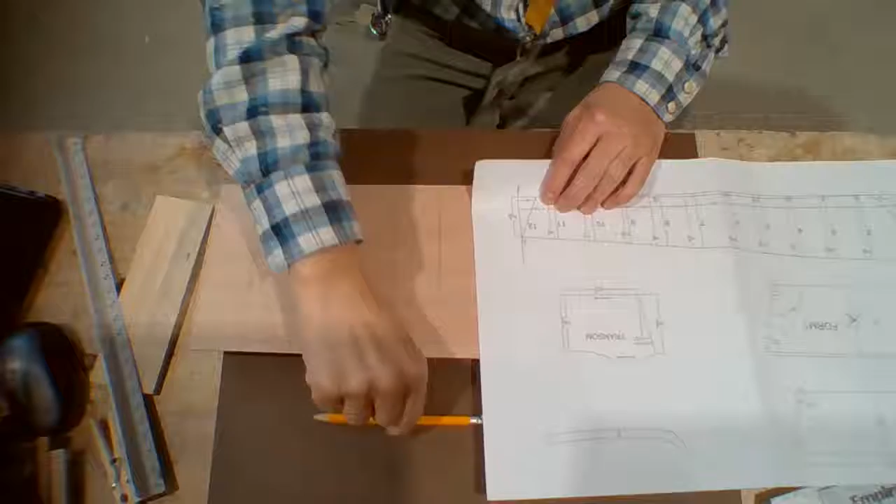Okay, I've got all my vertical lines numbered, and now what I'm going to do is plot out where the side of the boat, you can see the side of the boat, intersects with the vertical lines that I've made. So, for instance, I can look at this one right here. At line 11, it's 15 and a half.

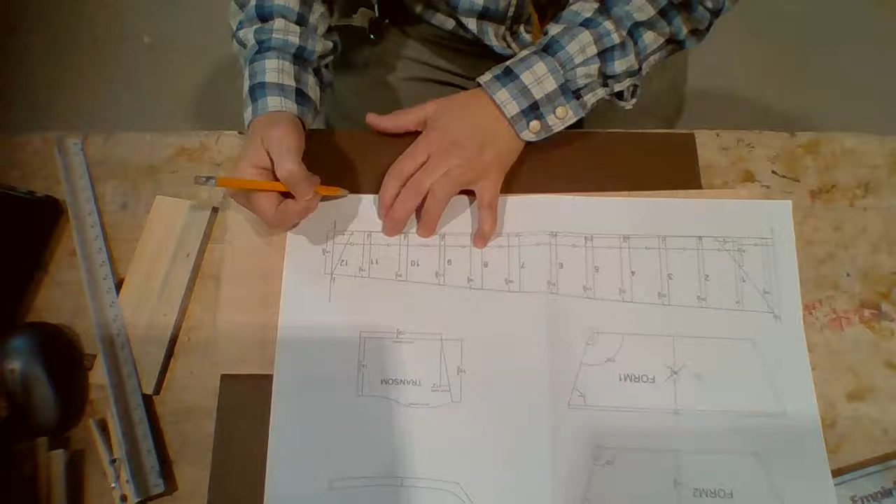Okay, so I've got to use a scale for this because I am measuring in eighths. So I had to find the eighth scale, and each of these represents an inch, and my measurement is 15 and a half. And if you look from the 0 going right, each of those lines is an inch. So it says 1, 2, 3, 4, and there's a 4 there.

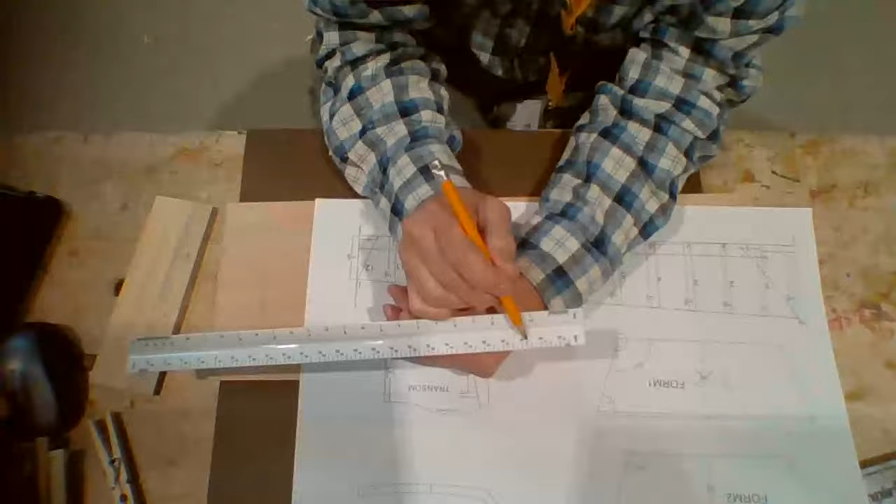Now, there are two sets of numbers, numbers on the top and numbers on the bottom. The numbers on the bottom don't make any sense for our scale. That's because they belong to another scale on this side. So we're just going to use the ones going from 0, and if you count over 1, 2, 3, 4, you see that makes sense. It says 4, 5, 6, 7, 8. That makes sense, right? So this is what I'm measuring. 0 this way, adding, and I'm going to come to 15. But I also need a half.

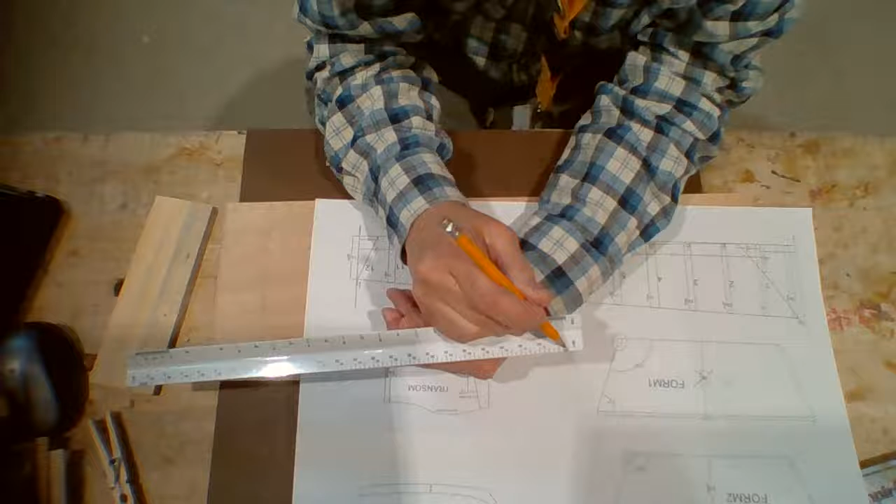So from the 0 over to the left here, there's 1 inch broken into some parts. Now, an eighth of an inch is very small, so it's not broken into much that's very helpful except the ½ inch mark. So the ½ inch mark, that's a helpful line. A 1/4 inch would be between the 0 and the ½ inch, kind of right in the center of that. 3/4 of an inch would be between ½ inch and 1 full inch.

And everything else, we're just going to have to estimate. Is it closer to an inch? Is it closer to ½ inch? Is it a little more than ½ inch? Is it a little less than ½ inch? Like that. It's going to be good enough for what we're doing. Okay, so I'm going to show you how to use this.

So I'm on number 11, right? And I'm looking for number 15. So here we go, because my measurement is 15 and a half. So one way to think of this is you can put the 15 down here, and 15 to 0 is 15, and then just add that ½ inch from this measurement, okay? And that's the line. You just put a little line on that, and you're good to go.

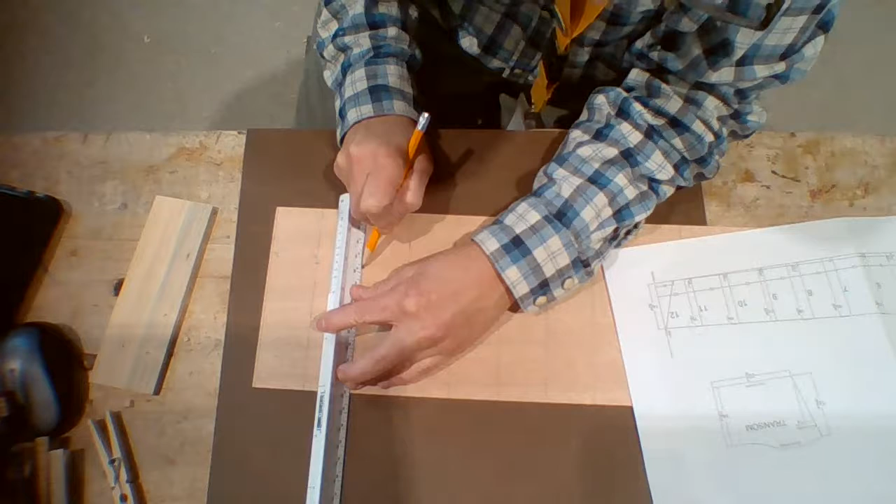So the next one, number 10, if I'm looking over here, says 16 and a half. Now, another way to do it is you could start off with the half, because you know you're going to have a ½ inch, and then you can go ½ inch up to 0, and then go to 16, and 16 is labeled, right? So then I've got a mark at 16 and a half, so I've got 2 marks.

The next one, number 9, is 17 and 9/16. Oh, geez, 9/16. So 9/16 is just a 16th bigger than 8/16, and 8/16 is 1/2. So let me put this on a half, and then just go a teeny tiny bit bigger, because we're in a very small scale here, and then I want to get up to 17. So I've got this little 9/16 here, and then I'm going to find 16, right? Here's 16, and then I want to go one bigger than 16.

So there you go. And if you looked at these, they're kind of 3 in a row. That looks sort of like it makes sense, right? Because the drawing is getting bigger here. Okay, so you're going to plot all of these all the way along, and the bottom ones all the way along. Just plot the measurements. I'm going to do a little bit right now about the front and the back.

So at the back, this measurement right here tells you that it's not right on the vertical, it's a 1/4 inch in from the vertical. Okay, so let's see. I don't know where it's going to be, but I do know that if that's a half, a 1/4 inch is less than that. So the 1/4 inch in thing is going to be about here, right?

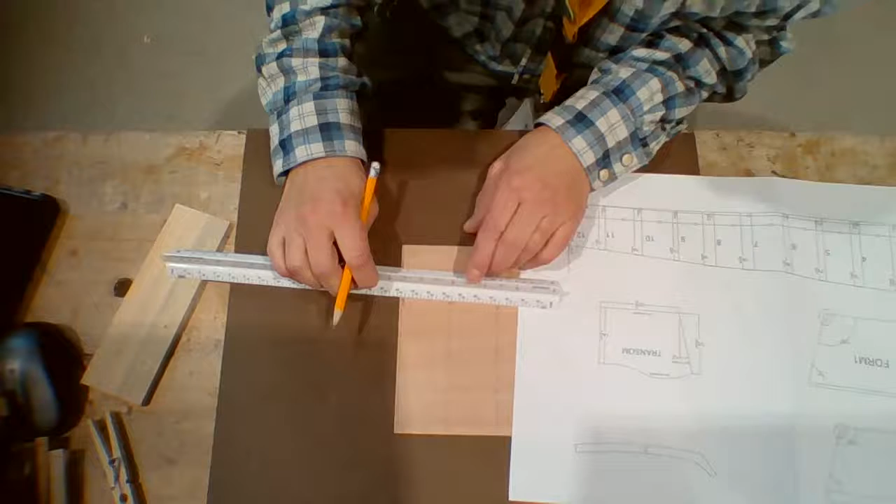And then the height of that is 14 and 9/16. So again, 14 and a little bit more than a half. So 12, 13, 14 at the very bottom edge, and then a tiny, tiny bit more than a half. Okay, so that's my intersection right there, okay? And again, that makes sense because these are kind of going down here. It's not going to exactly be a straight line because, believe it or not, this is a slight curve, but at least they're kind of making sense, okay?

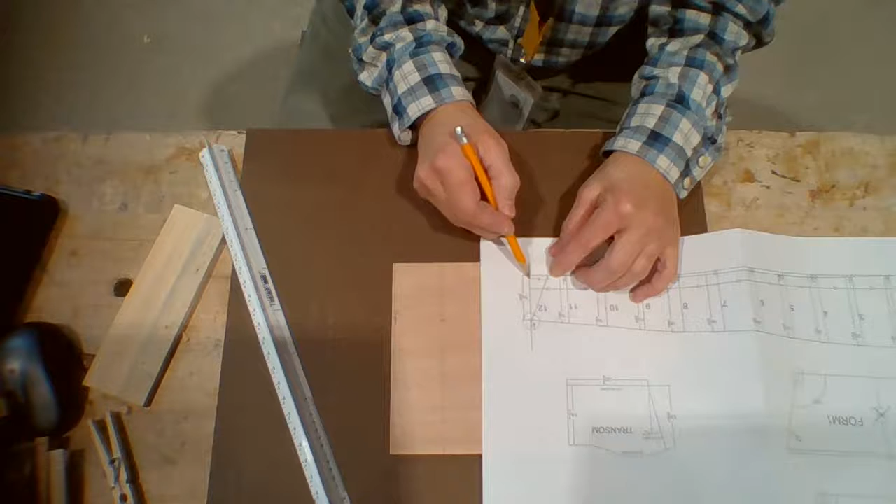So I can plot the back of this, the transom, where the side meets the transom, because I've got some information of where this line lands on the base. And it says it lands on the base 6 inches in from that number 12 line. So I can take my scale and I can put it right on 6 inches. So I've got 4, 5, 6 inches here. I got the 6-inch line right on the number 12 line. I can go back to the 0 and put a little mark, right?

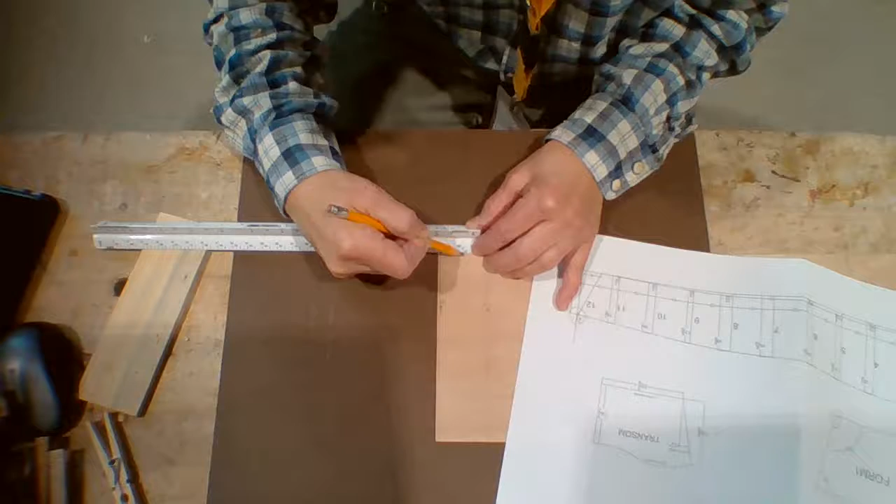That's the 0 mark. So now all I need is a straight edge, and it goes from my 14 9/16 by 1/4 of an inch in, and it goes to this line, right? So I'm just going to use this and just gently sketch that in, make sure it's in the right place. It looks good. Then I can put it in a little bit darker. And that is one full line on the side. Okay.